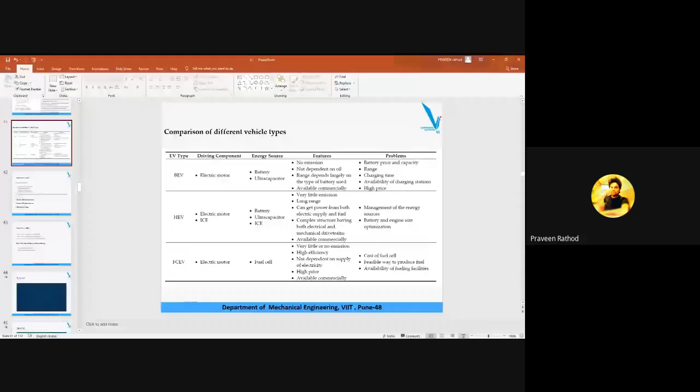Okay, we are into the last phase of our first chapter. So when we compare different types of vehicles, here I have shown you the EV types: BEV, HEV, and FCEV - fuel cell electric vehicle, hybrid electric vehicle, and battery electric vehicle.

For driving component, we know electric motor is there, and here we use electric motor as well as internal combustion engine and electric motor. For energy source, these are the sources we use in battery electric vehicle: battery and ultra capacitor. For HEV we use battery, ultra capacitor, and IC engine, and in FCEV we use fuel cell.

Features for BEV: no emission, no dependence on oil. Range depends largely on the type of battery used, and it's available commercially.

This is HEV: very little emission as compared to the internal combustion engine or totally gasoline engine. Long range is provided by the hybrid engine, and it can get power from both electric supply as well as fuel. There's a complex structure because both sources of energy and power are there - one from battery, another from IC engine - so electrical and mechanical drivetrain both exist because of this complex structure. This is also available commercially.

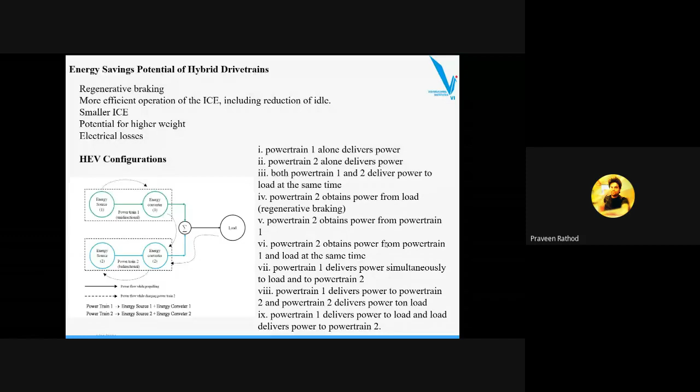Last week I showed you how exactly - in this figure I showed HEV configurations, energy source 1 and energy source 2 - how exactly it manages the energy sources from powertrain 1 and powertrain 2. For fuel cell, the cost of fuel cell is very high, along with the feasible way to produce the fuel and availability of fueling facilities. So these are some of the driving components, energy sources, features, and problems when we compare different vehicle types.

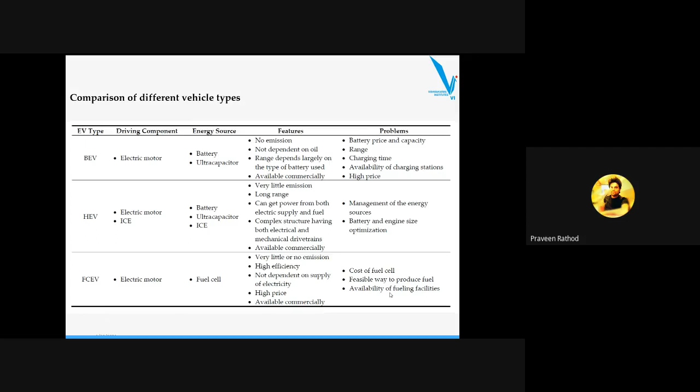So coming to the power flow in HEVs or power characterization in HEVs - how are we going to characterize the power? Why are we characterizing power flow in HEV? What are the power flows?

There are different configurations in HEV. These different power control strategies are necessary to regulate the power flow in different components in the hybrid electric vehicle - especially I'm focusing on hybrid electric vehicle because we are studying HEVs.

Normal people cannot bear that cost. We need minimum system cost along with good driving performance.

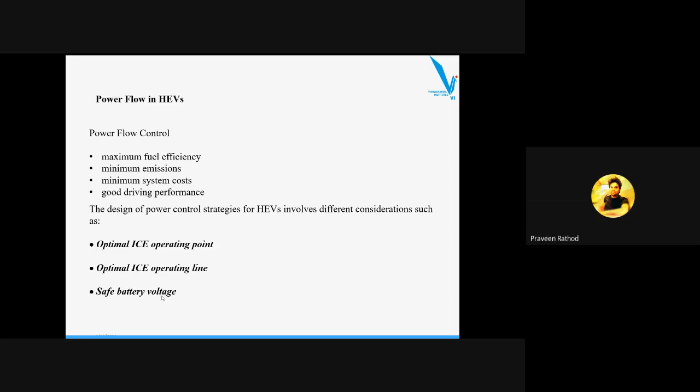So these are some of the power flow characterizations - power flow in HEVs. How are we going to characterize power flow? These things are studied in detail in the hybrid electric vehicle drivetrain chapter. There we have a point about power flow in hybrid electric vehicle, where we are going to see the different modes of power flow. Just to see the characterization here - how we are going to characterize the power flow in HEV.

So power flow control in series hybrid - when we see power flow control in a series hybrid, there are four modes of power flow control we have. First is for normal driving or acceleration. When we consider a series hybrid vehicle, with the help of a figure we are going to study this in a future chapter. Second mode is for light load - how the power flow should be there for a light load.

And mode 3, so what will be mode 3? For mode 3, it's the braking or deceleration. And for mode 4, vehicle at a stop. So when the vehicle is at a stop, how does the power flow in HEVs?

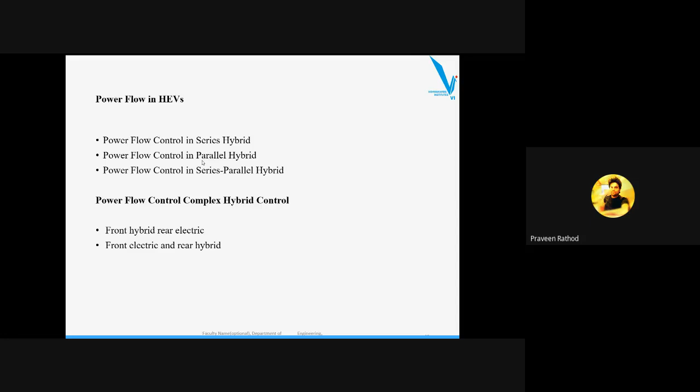Detailed study will be done in a future chapter with the help of a figure. So just coming to one video, a rewind of this chapter. This concludes the first chapter. So just I'm rewinding the first chapter, just see the video.

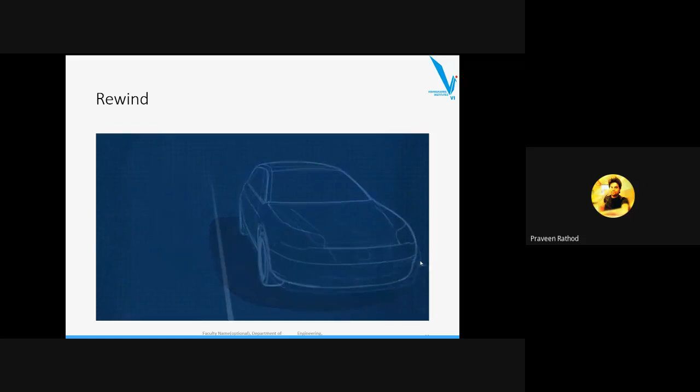Okay, yes, this is a rewind of hybrid electric vehicle. In short, I have shown you this with the help of one video. So one more video I'm going to show you, regarding the performance.